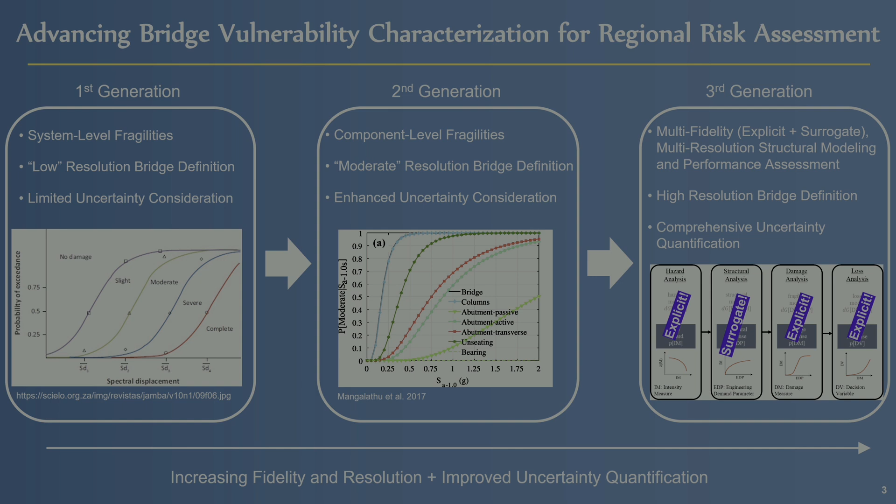There's also the third generation, which I'd say is more geared towards the types of things Greg was talking about, where we're using either explicit response simulation or surrogate models. The work we're doing is mostly focused on that second generation, where we're using these component level fragilities. But as you'll see later, particularly in the functional recovery method, we did develop it with an eye towards the third generation.

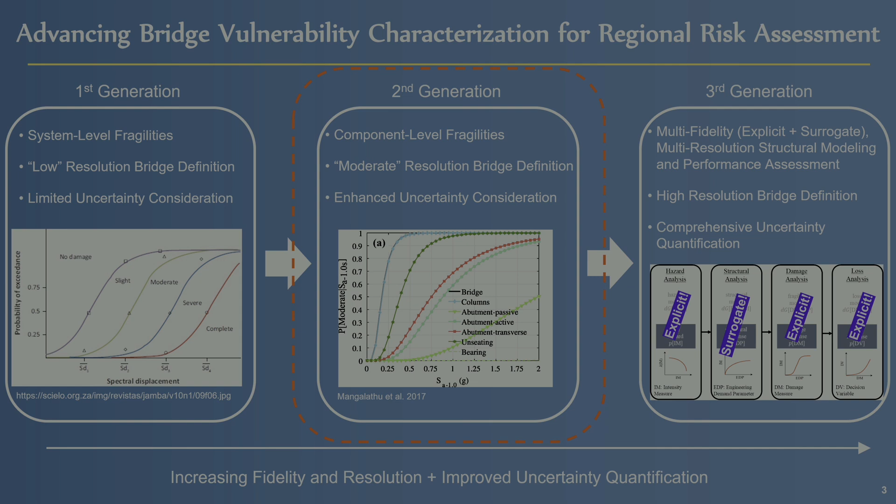So the workflow for the regional assessment of functional recovery has to start with seismic hazard characterization. The two things I want to mention are that we're doing this characterization and assessment looking at a single scenario, and then we're also doing a stochastic event set-based assessment.

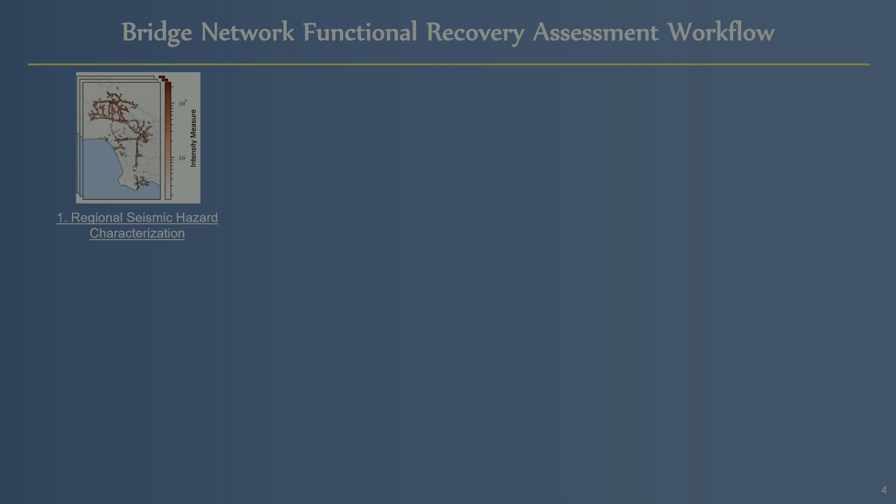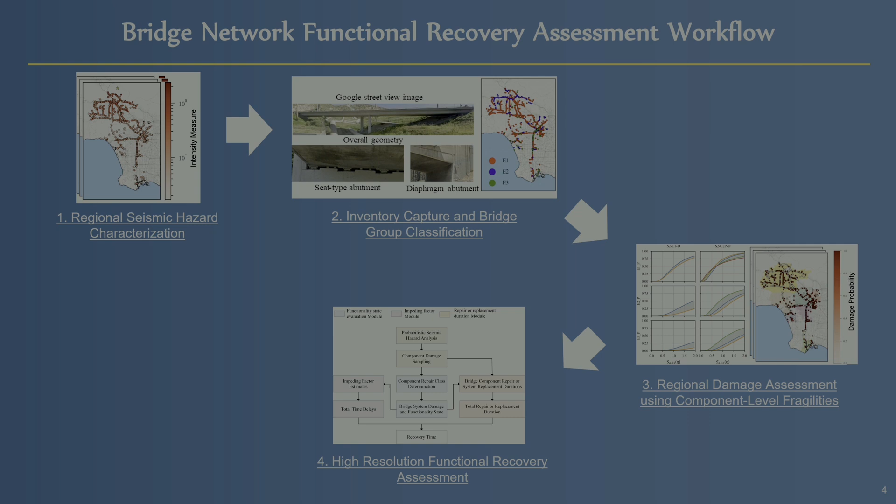We spent a lot of time trying to gather information about the actual inventory—I'll talk a little bit about that. And then, as I mentioned earlier, we're using these second generation or next generation component level fragility curves for the damage assessment. The key here is that these fragility curves allow us to simulate damage at the component level. Then we're doing this high resolution functional recovery—high resolution just meaning we're doing it even though this is on a regional scale. When we're doing the functional recovery assessment, we're doing it for individual bridges, and then we aggregate that information to get network scale performance.

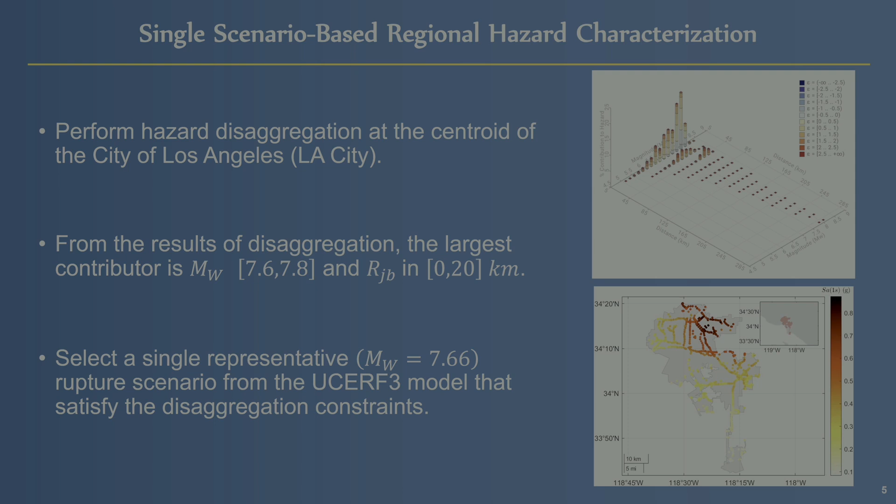As I mentioned before, for the hazard we looked at both a single scenario as well as the stochastic event set. For the single scenario, we started by doing a hazard disaggregation at the centroid of the city of LA, and based on the results of that disaggregation, we selected a single representative scenario from the UCERF3 model.

For the stochastic event set hazard characterization, you want to consider the full suite of events that can affect the region. For LA, this is on the order of hundreds of thousands. We don't want to run through all of those, so we use what's called an event subset selection methodology. The idea is you use a subset of events, but with the goal of replicating the results you would get if you used the full set.

There are different methods available to do this. We went with the 'friends and family' method, meaning we used a model developed by my colleagues Scott Brandenberg and Jonathan Stewart, and others.

Scott challenged me to explain this in 20 seconds or less. There's a paper here if you're interested in the details.

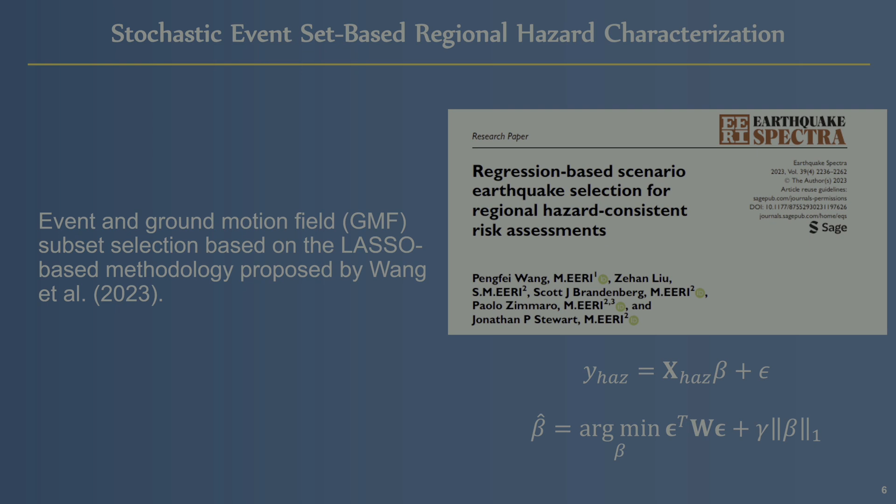Basically what they're doing, which I thought is a clever idea, is trying to predict the Y, which is the hazard curve associated with all the sites, as a function of the rates of the different rupture scenarios. They're using lasso, which does a shrinkage of the coefficients such that you remove some of the scenarios if the coefficients shrink to zero, and that gets you your subset of events to work with.

So what I'm showing here is what we're trying to do with this subset is be able to match the hazard curves at all the different sites we're considering. Here we looked at, and ended up using, 400 ground motion maps from 30 rupture scenarios, and we're showing a range of matches from the best to the median, as well as the 96th percentile error.

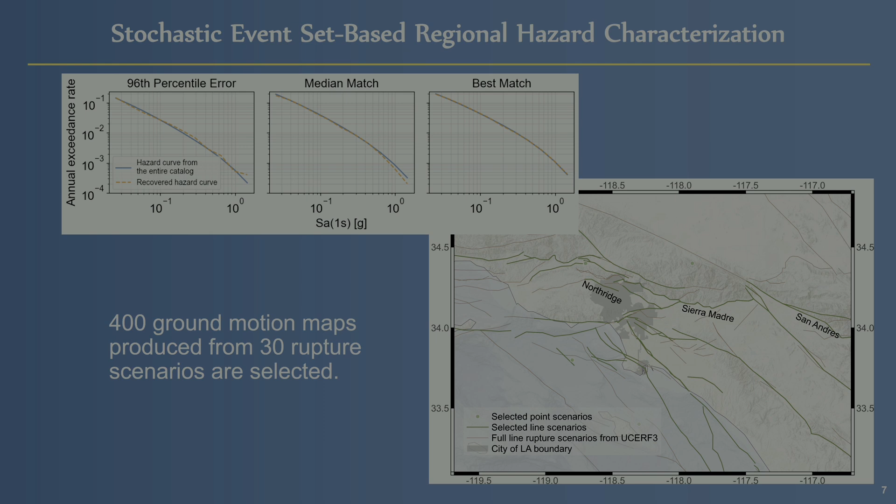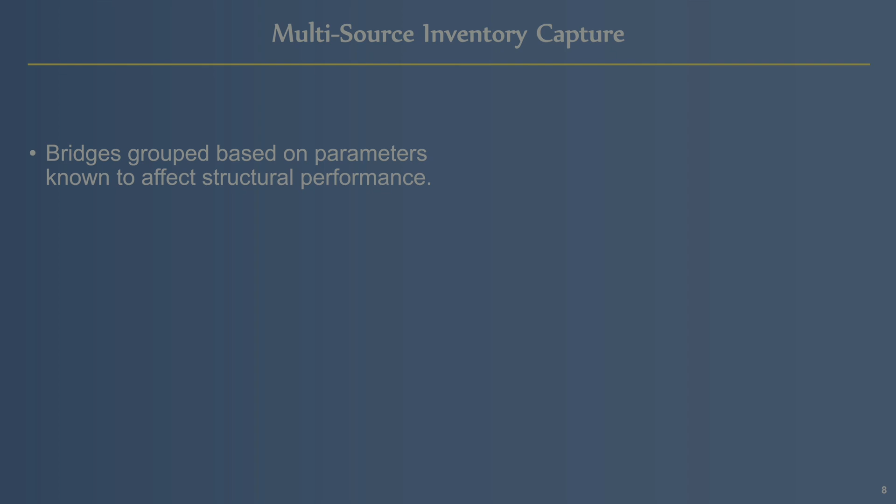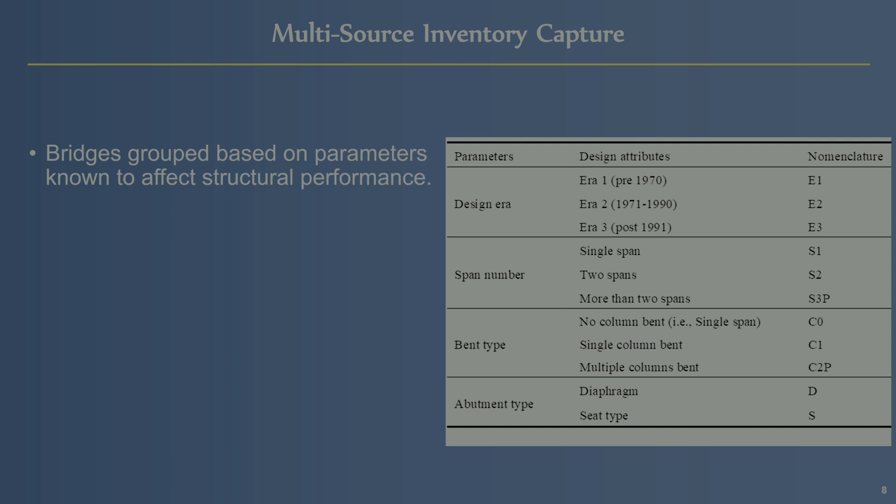One of the things we had to spend a lot of time on, and this is where it was helpful having a collaboration with our colleagues at McGill, is capturing the inventory. So we did this assessment by coming up with a set of bridge classes, similar to the classes used by HAZUS based on different parameters like the design era, the number of spans, the bent type, the abutment type. We needed to take the individual bridges from the inventory and place them in these various classes based on these parameters.

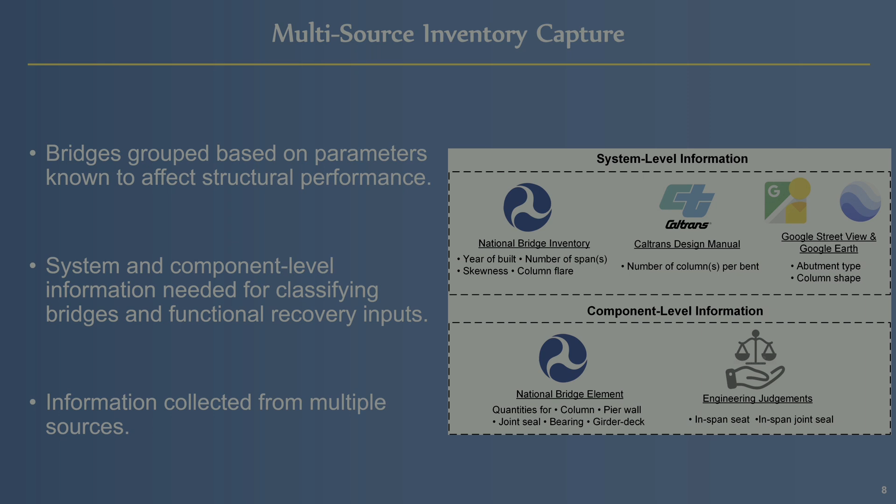So we had to get information both at the system level as well as the component level. The component level information is needed for the damage assessment, but also for the functional recovery. We used a number of different sources, a lot of them have been mentioned earlier, things like the National Bridge Inventory and the National Bridge Element.

Just a little bit about the inventory. About 70% of the bridges are in era 1, so these are pre-1970 bridges, then 20% era 2, 10% era 3. When you look inside of the different eras, you can see some of the other characteristics that the fragilities are based on.

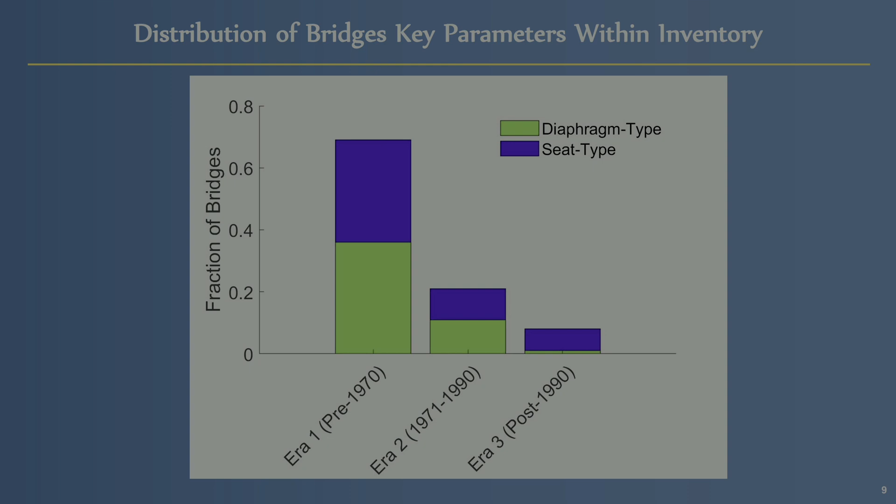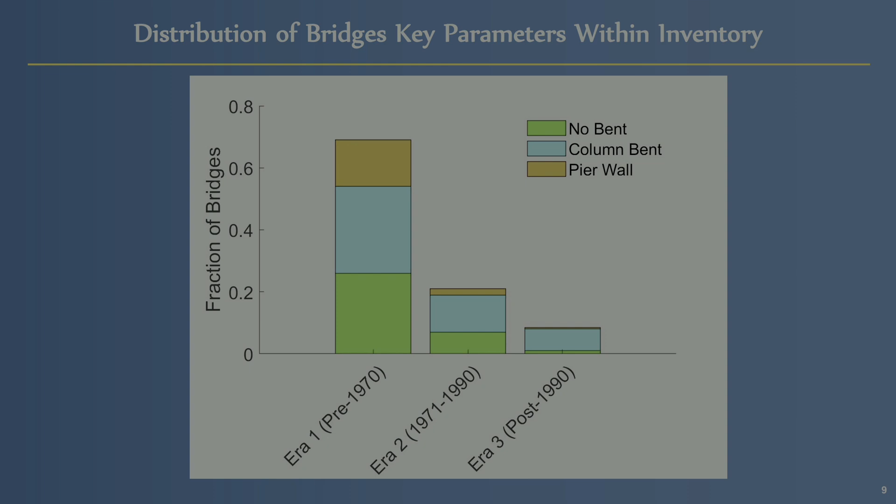For example, you can look at the distribution of diaphragm versus seat type bridges. You can look at distributions in terms of the number of spans, and also the type of bent. So if it's a single span bridge there's no bent, and then there are bents made of columns, and also bridges sitting on pier walls.

A big part of this effort was going through a lot of the research that was funded by Caltrans. Greg mentioned Reggie DesRoches and Jamie Padgett did a lot of that work. We went through the literature and assembled a lot of those component level fragility curves. There's a data paper with the details of those fragilities that's making its way through Earthquake Spectra.

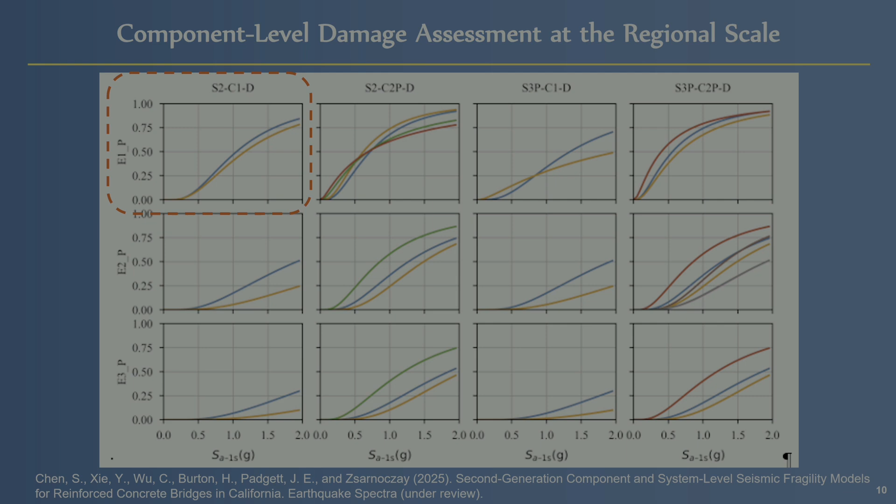Basically you can look at a particular case, here we're looking at an era 1 bridge with 2 spans, 1 column bent, and a diaphragm type bridge, and you get your component fragility information.

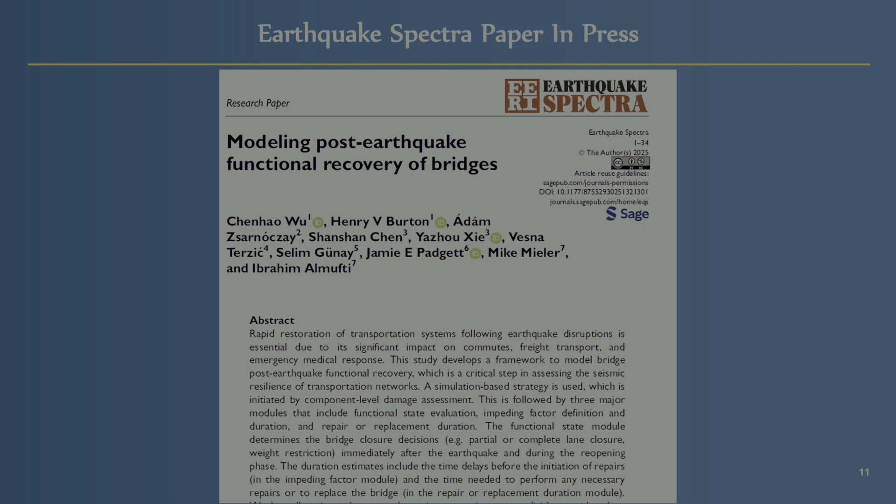Okay, so now I'm going to spend a few minutes talking about the functional recovery methodology. I'm going to go through it very quickly. If you're interested in the details, there's a Spectra paper that's in press right now that has all of the details. So the framework, you can think of it as in 2 parts.

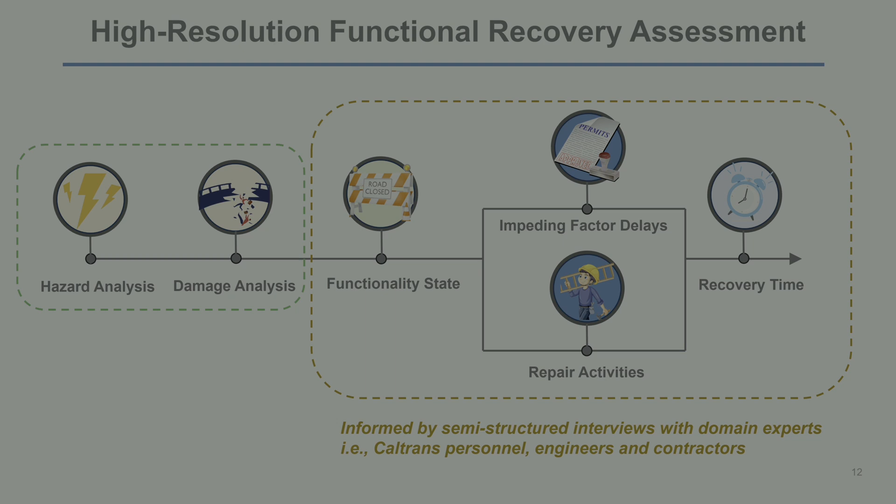So we had to spend time thinking about how you go from physical damage to different components, how those things affect the functionality state, thinking about the impeding factors, these are activities that need to be carried out before you can even start the repairs. The repair activities themselves, and for both the repair and the impeding factors, we had to think about not just what had to be done, but the sequencing of these activities, and then ultimately coming up with the recovery time.

I mentioned before that even though the project is sort of sitting in the middle using those 2nd generation fragility curves, we developed this framework with the 3rd generation vulnerability assessment in mind, meaning the method can accommodate doing what we call IM-based assessment. So this would be if you have the component level fragility curves that are conditioned on the shaking intensity, and it would give you the damage.

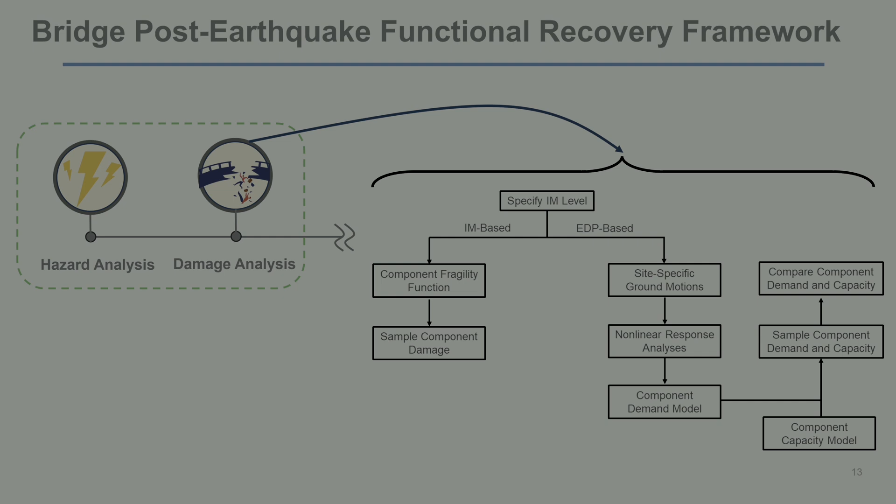That would be the IM-based approach. And then also the EDP-based approach, where you would go through and build a structural model, do detailed nonlinear response history analyses. You have a demand model from that. You also have a capacity model, and you can simulate damage.

Okay, so we're trying to model functional recovery. So one of the things we have to do is define what we mean by functionality states. And basically, these states are based on different types of disruptions that can happen once a bridge is damaged.

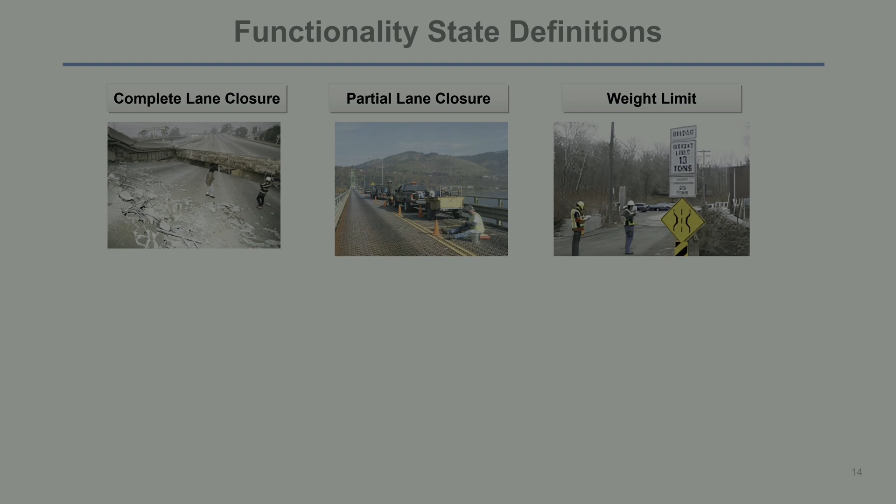So for example, you can have either partial or complete lane closure, or you can have some type of weight limit restriction placed. And so based on those things, we came up with this set of functionality states.

We distinguish between functionality states that are only relevant to the reopening phase, because we found in discussions with Caltrans and others that some things happen primarily as you're reopening the bridge, where some types of restrictions, and other restrictions are placed during the immediate response or reopening.

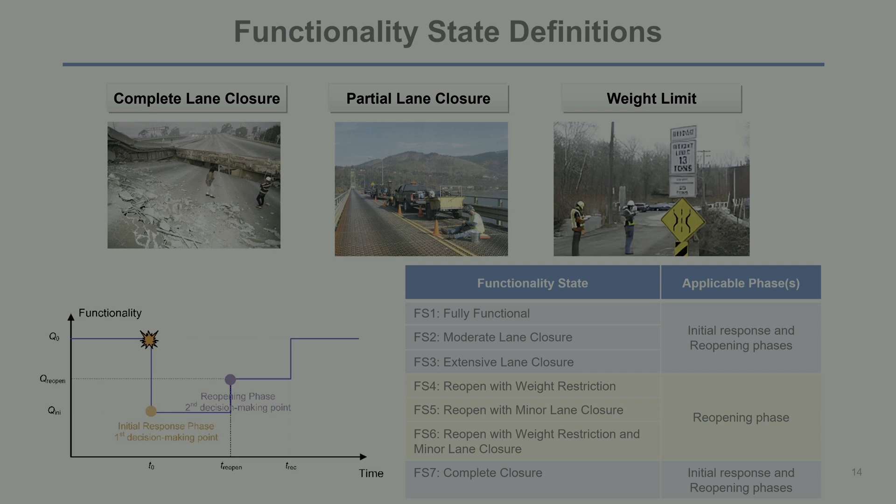So we have these 7 functionality states that range from full functionality to complete closure, and then with some type of partial closure in the middle.

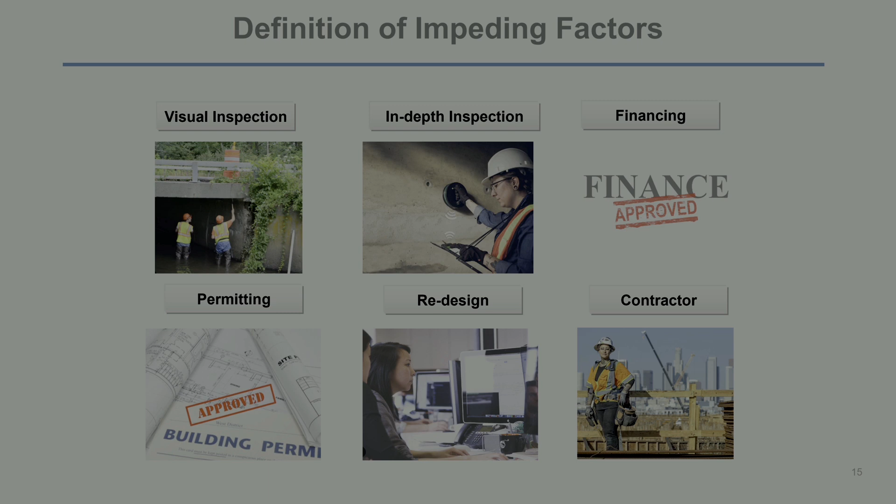I mentioned before we're considering these impeding factors. Again, these are activities that need to be done before the repairs start. So things like doing visual or in-depth inspection, getting financing, permitting, and things like that.

And not only do we have to consider those factors, but we also have to consider the way they're sequenced. So we spent a lot of time with folks from Caltrans. Shout out to Sharon Yen if she's here for connecting us, thinking about the process, what actually happens after an earthquake.

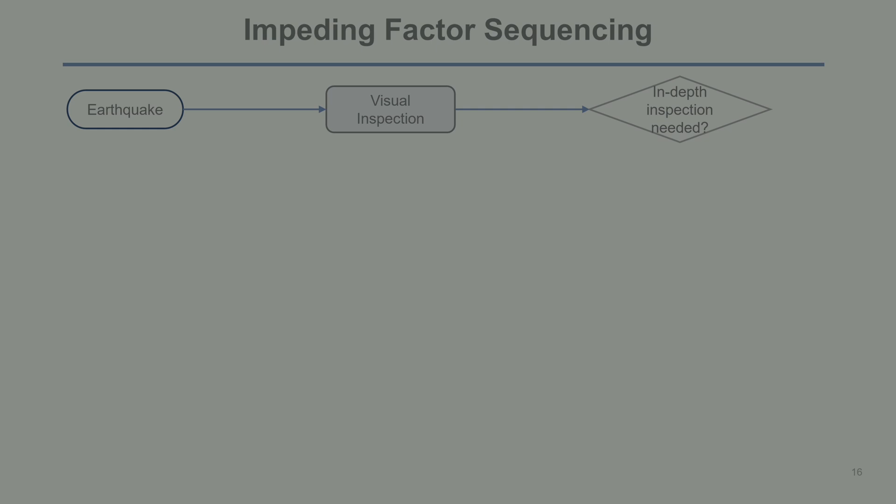So for example, you would do a visual inspection and you would determine whether an in-depth inspection is needed. That means, is the damage or lack thereof obvious to the extent where you're pretty certain on what the state of the bridge is, or you may have to call for a more in-depth inspection. And then based on that, you can finalize your closure decision.

We also took into account the possibility of an emergency protocol. So it's often the case that if a bridge is damaged, depending on the importance of the bridge, the extent of damage, that there would be a state-level emergency protocol triggered that would fast-track certain activities.

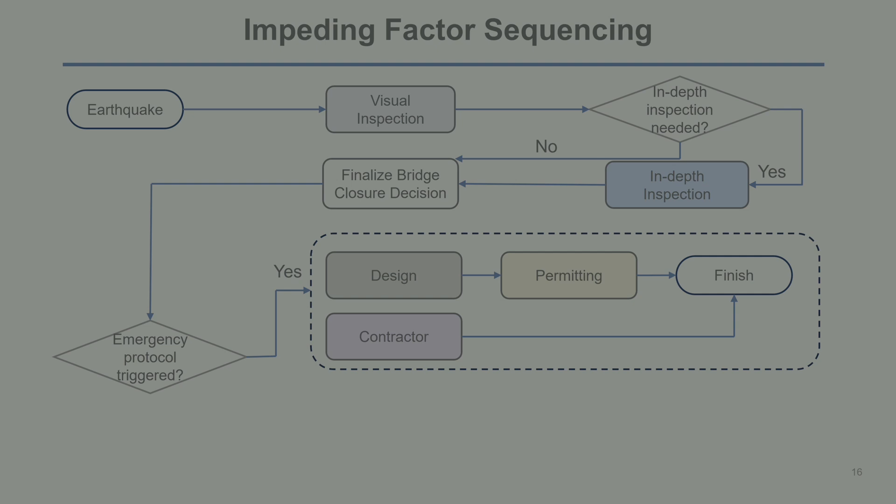So for example, in the case of the impeding factors, if there's an emergency protocol, then the selection of the contractor would happen while the design is happening, and sometimes the contractor would participate in the design. Whereas if there's not, then there's a different sequencing, so the contractor would be selected after the design and things like that.

I mentioned before, so we have to think about the sequencing of the impeding factors, but we also need to think about the sequencing of the component repairs. So this is one example of a sequence shown here.

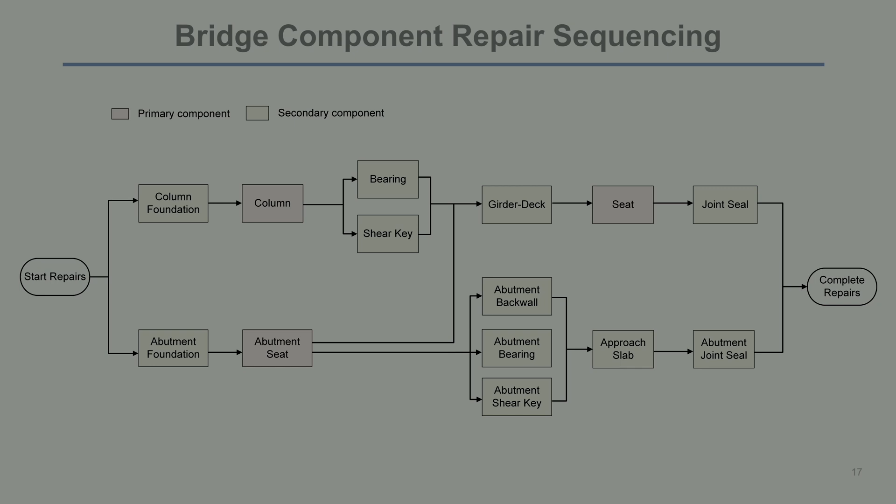So the row on the top is for the bent foundation and superstructure. The row on the bottom is related to things related to the abutment, so the foundations and the superstructure part of the abutment. And then there's also some interaction between those two layers.

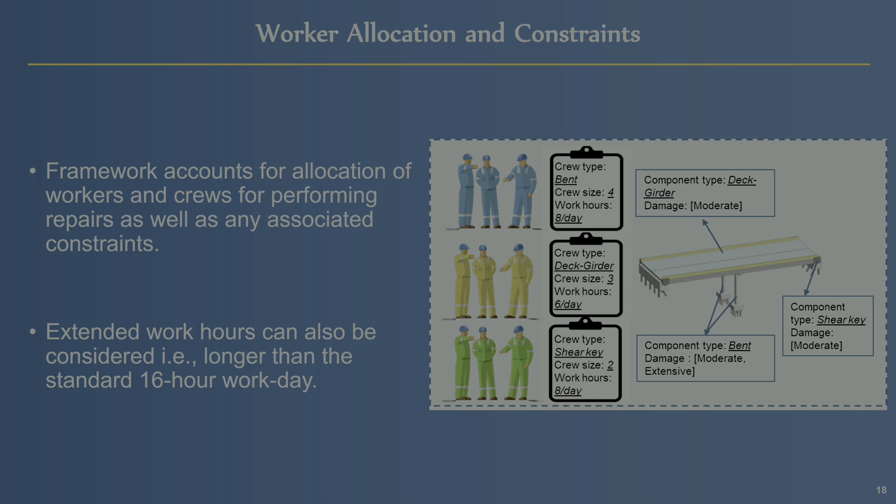The model also can incorporate constraints related to worker allocation, so both in terms of the number of workers per crew and as well as the number of crews and how they're assigned to do repairs of different components. And that's just trying to be as realistic as possible in terms of how these activities are carried out in a real earthquake.

So they talk about different aspects of functional recovery, like definitional, meaning what has to be done to achieve functional recovery, the policy side, what is acceptable, there's the implementation side, so how would this actually be implemented in practice, and then also what strategies that can be used to enhance functional recovery.

And that one is probably the one I'll focus mostly on, meaning, are you going to do retrofits, are you going to replace bridges, are you going to enhance the resource allocation after the earthquake to actually help with the recovery.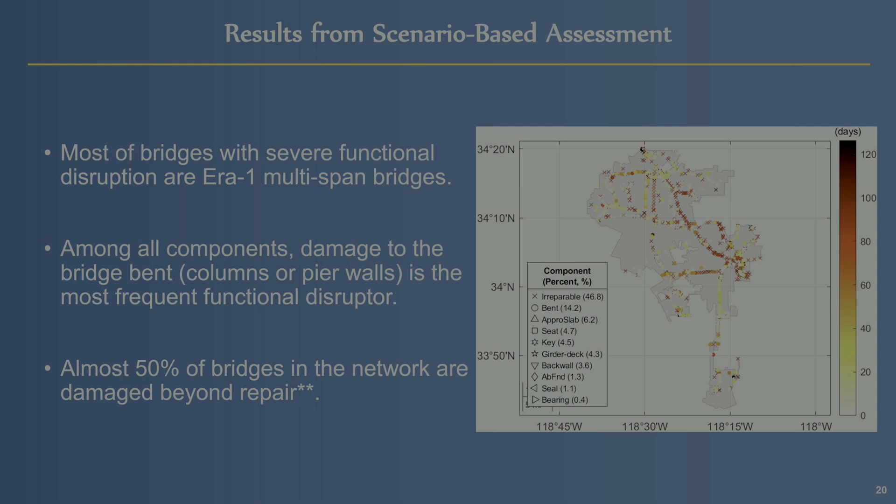The last point, that almost 50% of the bridges in the network are damaged beyond repair, I put an asterisk on because is this realistic? These results are fairly new, so we still have to spend time looking at past earthquakes to see how realistic these results are, particularly in terms of the damage.

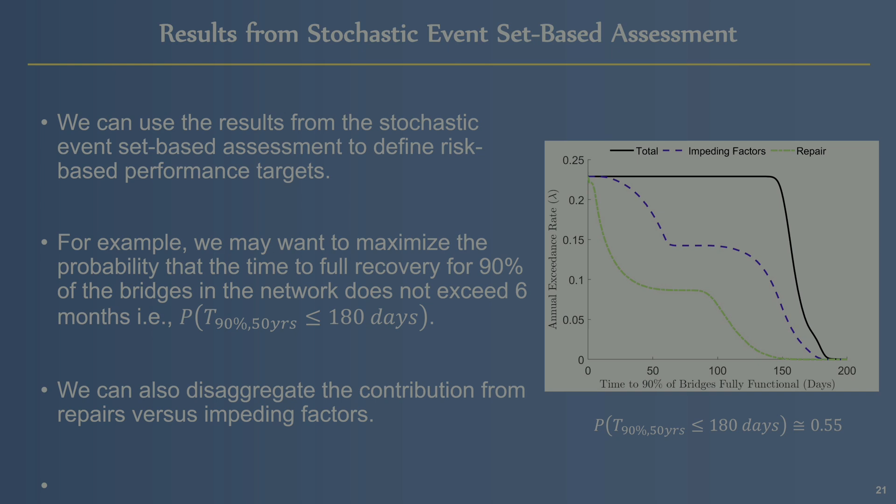You can also disaggregate the contribution from repairs versus impeding factors. We also looked at the effect of different performance enhancement strategies.

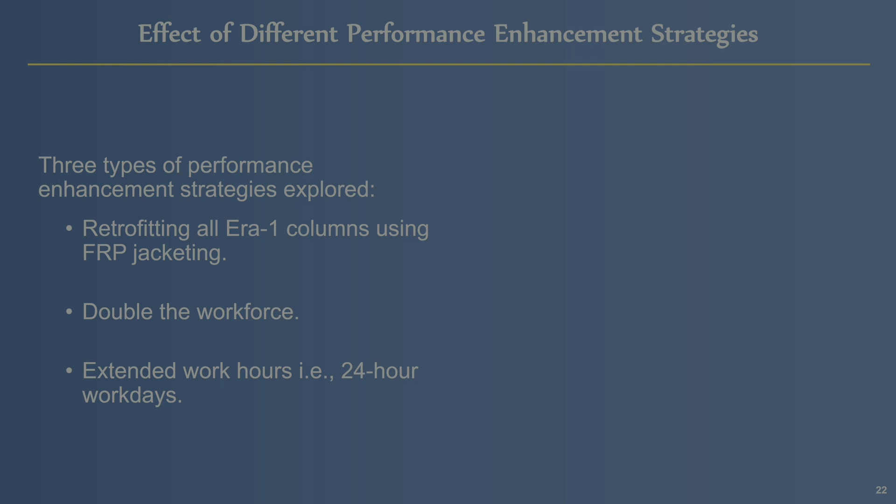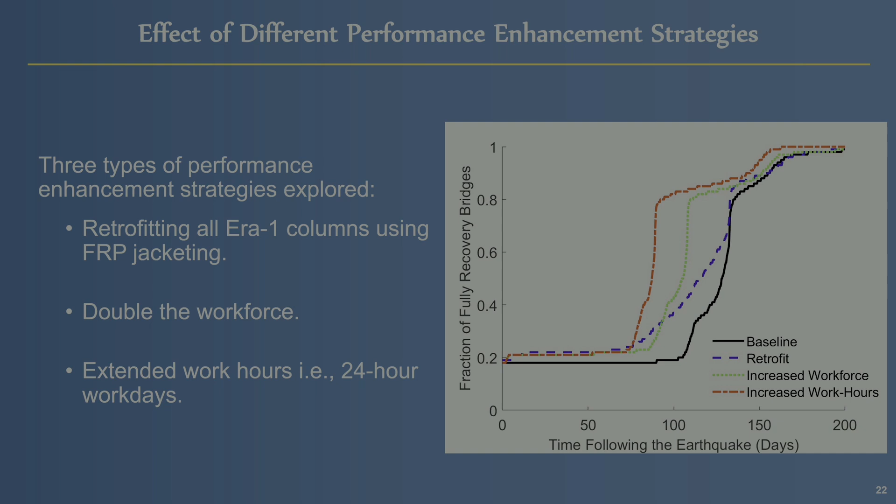After about 75 days, you get some enhancement in the recovery trajectory, and looking at the workforce and extended work hours, those also have a significant impact on that recovery trajectory.

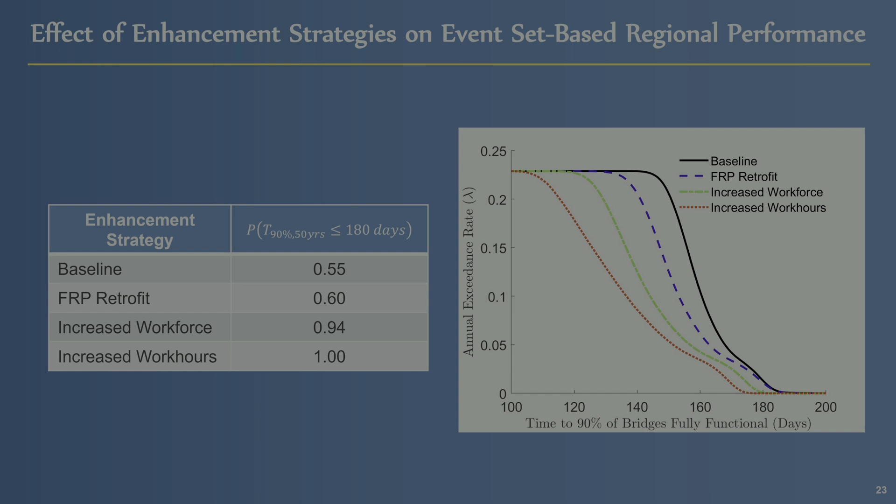The baseline probability was 55%. The retrofit increases that to 60%, and you can see the numbers for the increased workforce and increased work hours as well. Again, the focus is less on the absolute value or the relative impact of retrofit versus increased workforce or work hours, since the doubling is somewhat arbitrary—it was more to get a sense of how these different enhancements affect overall performance.

So to wrap up with summary and next steps: at a high level, the goal of this project is to enhance regional risk and resilience assessments using component level fragilities, which give a much richer information set to guide decision making. We're assessing risk and resilience both in terms of functional recovery, as presented here, as well as repair costs, based on ongoing work by our collaborators at McGill.

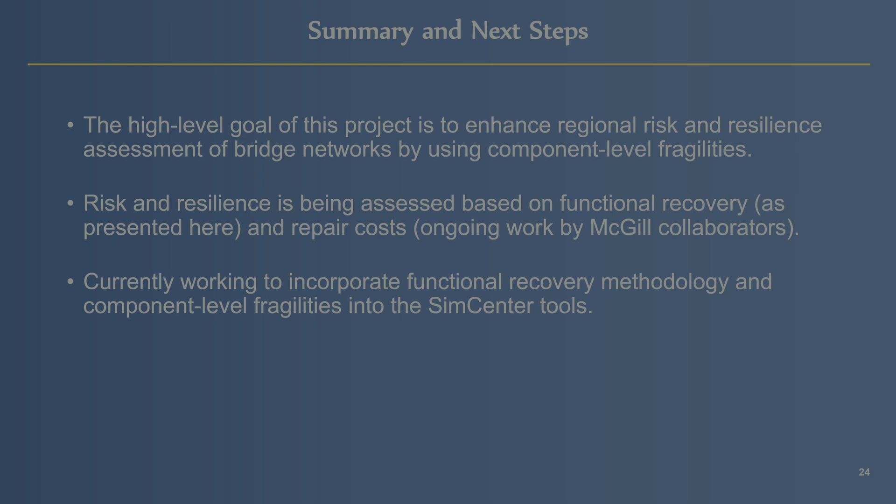We're currently incorporating the functional recovery methodology and component level fragilities into the SimCenter tools so others can take advantage of them. Ultimately, we're trying to enable more precise estimation of costs and benefits associated with different enhancement strategies. I showed a few types of enhancements here but didn't talk about the cost associated with any of them—that's something to think about in the future when making decisions about enhancing the resilience of the network.